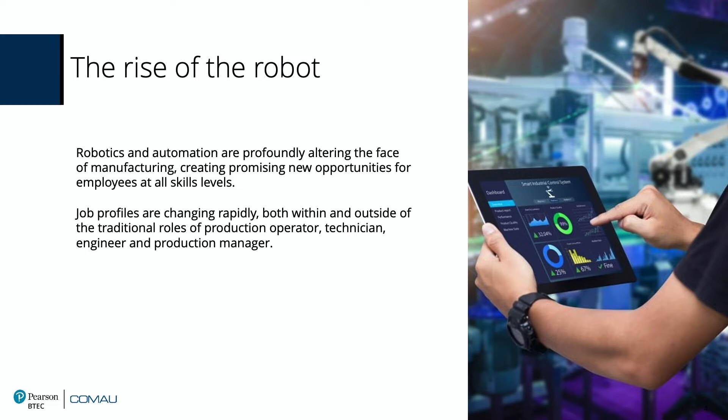So just to give you an example, in the next slide we have a short video.

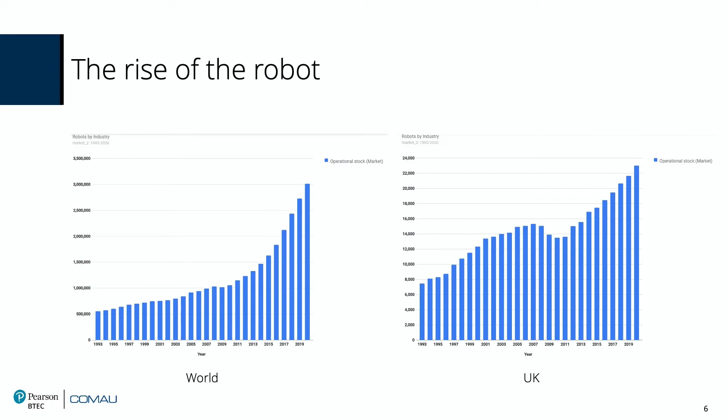So the consideration is, if you can go to the next slide, that companies and industries, not only industry, in order to stay competitive, need to reduce production costs. So this industry must use industrial robots in order to increase the speed of the manufacturing process and reduce the cycle time, raising production efficiency.

So as we've seen in the video, for example, the robot can do these repetitive jobs, and people can be used in a more creative way to improve the way to do manufacturing these days. So these repetitive jobs, if we look at the past, the cost of these repetitive jobs is about one-tenth of the cost of 10 years ago.

So the five potential impacts of robots in industry today are: first, as we say and report in this slide, manufacturers are shifting to advanced robotics and flexible automation. This is clear.

This is clear also from the picture that we have seen. Robot and automation will not replace our workers, but they will change the skills and requirements needed for higher skilled jobs. So the work of people in the plant will not be the same, and this is an important point for training. The increasing use of robots and automation will significantly change manufacturing jobs, and industry and education must be prepared for this change. Training is an important part of that.

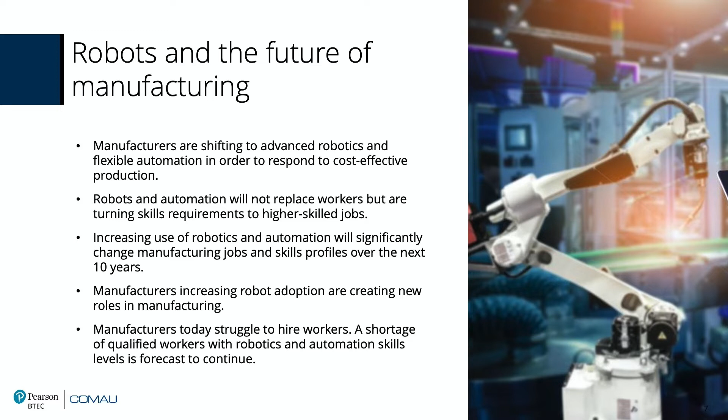There will be, for sure, 4 classic profiles that will be impacted by this introduction of robotics and automation: the production operator, the maintenance technician, because with the introduction of technology the maintenance will also change, but also the engineer and production manager. But the most important change will be at the level of the production operator, and this will be produced by this rise of robotics and automation over the next 10 years.

Of course we will have complex applications that still require specialized knowledge, but there are also trends where the robot will be easy to program, and especially to retask, and this will be done directly by the people, by the production operator in the plant.

So there will be 2 types of roles that will deal with robotics: the people that will program the robot for complex tasks, and the production operator that will maintain and reprogram this robot.

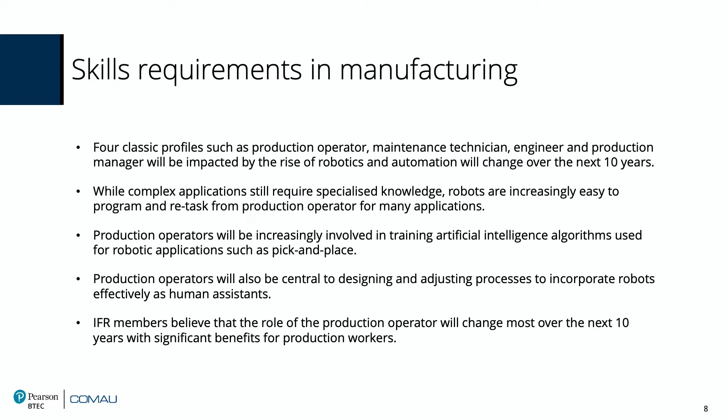To give you an example, in the next slide please, Phil. The production operators today, but also in the next years, will work with the robot. There will be this collaboration between the human being and the robot. So the factory cannot be what we call a dark factory, a factory without humans.

This is something impossible. Most probably industry would like to have this kind of dark factory, but this is impossible because the robot should be programmed and the robot needs assistance. The most interesting scenario is not this dark factory, but a factory where the robot and the human collaborate together. The International Federation of Robotics estimates that 50% of humans will be working with the robot in the next 10 years, meaning that our factory, as we know it today, will change a lot.

This task for the production operator will include programming simple applications. So it means someone at Comau will program a robot doing complex programming, but the people in the plant will continue to improve the application that we generate. The production operator will also be involved in monitoring the robot's performance.

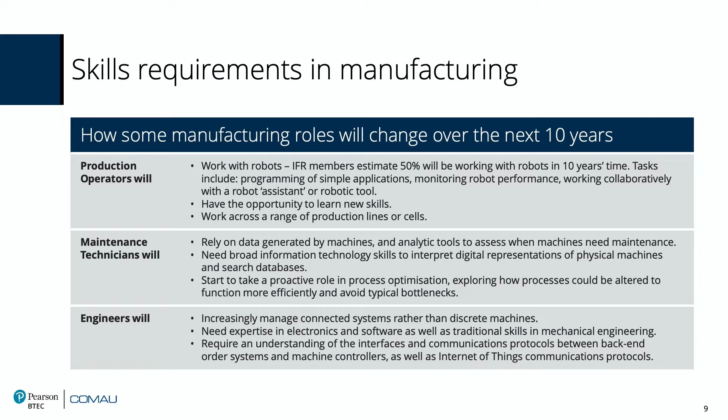Thanks, Phil. Thank you, Massimo.

So it's a really interesting and relevant overview of what's happening in robotics and what the future looks like. And this is the central motivation for Pearson to work in partnership with Comau to develop this qualification and learning support.

We very much see this as a whole package of support for you. What we've done is develop a BTEC program which complements the Comau robotics software, and I will show you a little bit of that so you can see what the actual learning materials look like. We've created 4 units which match exactly with 4 Comau learning modules, and those are modules which learners will log into. They'll log into our Pearson Learning Hub and work through these learning modules on computer. So there's an exact alignment between the BTEC unit and the Comau module.

The program is 55 hours of duration, so it's a short program. And the design of the program, as Massimo has alluded to, is very much to give a real practical industrial showcase of how a robotic arm is programmed. So it's not a big discourse on the underpinning history of robotics, etc. It's a real practical vocational application - how a particular robotic arm is programmed. So learners get a real insight and understanding of robotic arm manipulation and programming.

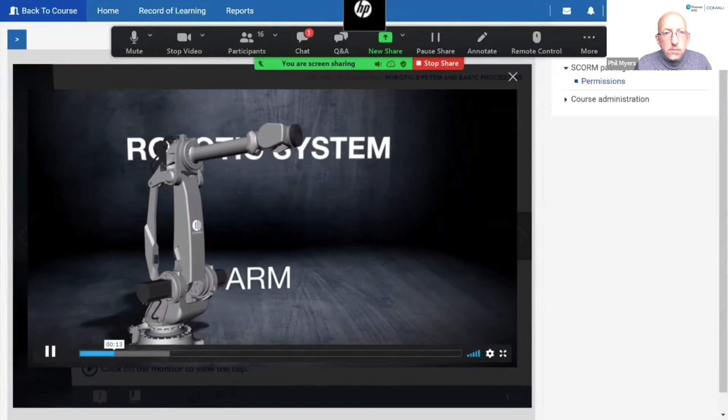A standard robotic system consists of a mechanical part, which corresponds to the robot and consists of an anthropomorphic mechanical arm, an electrical part needed to manage the arm, the control unit, and an interface device that allows communication with the arm and control unit, the teach pendant.

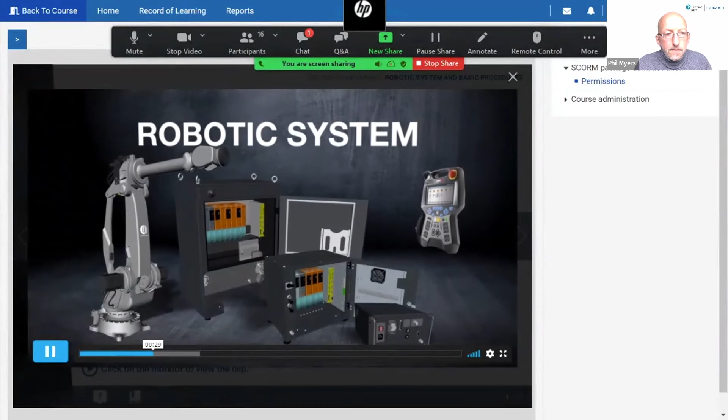So I won't play all of that, but you'll just get a little sense there, I think, of the resources. So I'll just come out of this.

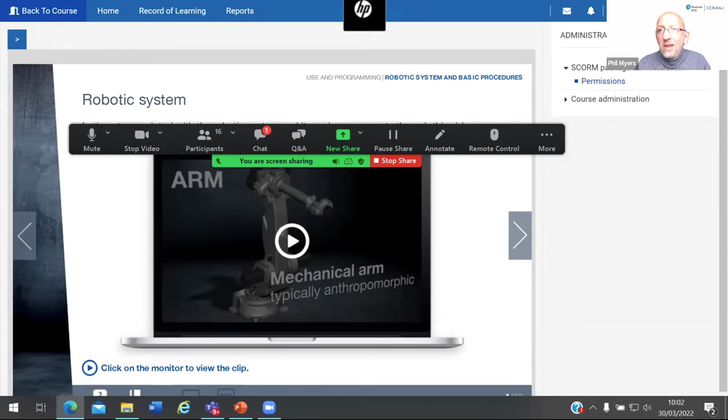Oh, excuse me. There we are. Yes, so that's the modules, that's the course. All of the support here in terms of the learning is available for you on Learning Hub.

So I'm just going to go back into the presentation. As I've said, the qualification is suited for blended learning. The modules, the Comau modules, the student resources sit very tightly with the BTEC unit.

But as I say, with the schedule of work, there's an opportunity to structure a little bit of class discussion, an opportunity to situate the assignment and the assessment within the course of learning. That can be taken as a single assignment at the end of the course.

As explained about the robotic arm and RoboSim, that's a piece of downloadable software which allows learners to manipulate a robotic arm on screen. There is also the opportunity to buy a robotic arm if you prefer to have that in class in your work studio, so there are some options here in terms of how you support that dynamic representation of the robotics.